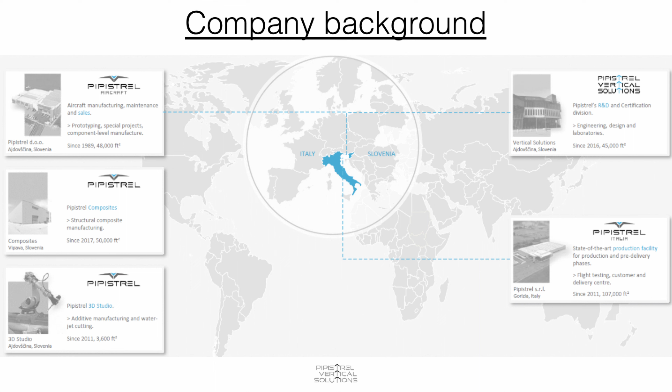As a background, Pipistrel Aircraft is an aircraft manufacturer of ultralight aircraft and general aviation aircraft, founded more than 30 years ago in Ajdovščina in Slovenia, where we have our main facility for manufacturing, maintenance, and sales, and Pipistrel Vertical Solutions, the research and development branch in which I am working. We also have a state-of-the-art production facility in Gorizia, where we produce most of our aircraft.

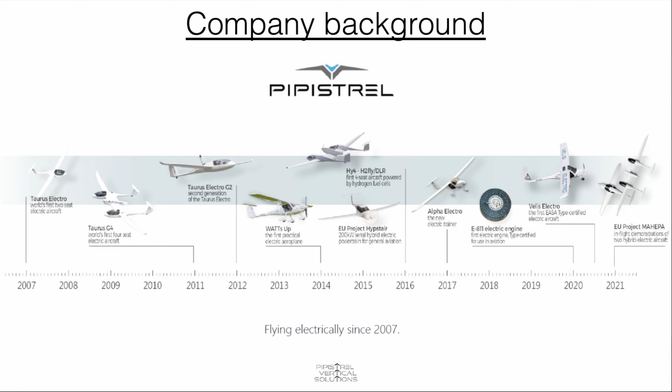Pipistrel is internationally renowned for being the pioneer of development of electric aircraft. We have been working on electric aircraft since 2007, 15 years ago, with the Pipistrel Taurus Electro. And in 2011, we modified this design to include two fuselages, as you can see in the picture here. The Taurus G4, which was the world's first electric aircraft with 4 seats, winning an internationally renowned

award by NASA. All this experience in research and development of electric aircraft allowed us to be the world's first aircraft manufacturer capable of type certifying an electric aircraft, the Pipistrel Velis Electro, back in 2020.

Now, coming to hydrogen, which is the topic of this conference, the company has extensive experience in hydrogen research activities for aircraft, starting with the HY4 aircraft, which is a modified version of the Taurus G4 with gaseous hydrogen and with fuel cells that was flight tested back in 2016. This design was improved and flight tested again in 2020 in the MAHEPA project.

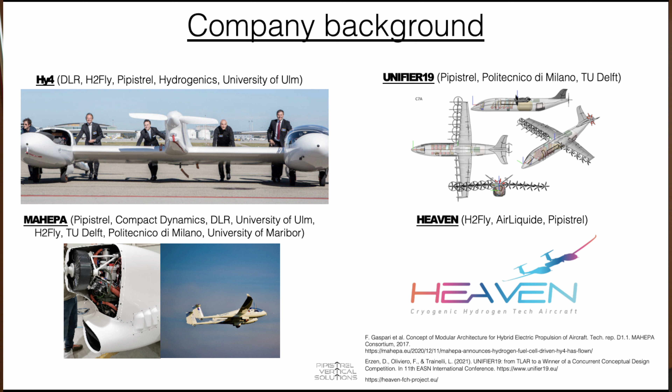And in the next months, we will be integrating a liquid hydrogen tank and flight testing this concept as well with liquid hydrogen and with fuel cells in the HEAVEN project, together with H2FLY and Air Liquide. Further, the company is researching into moving into the commuter aircraft segment with the UNIFIER19 project, in which a 19-seater aircraft with liquid hydrogen fuel and fuel cells was designed and assessed in terms of market interests.

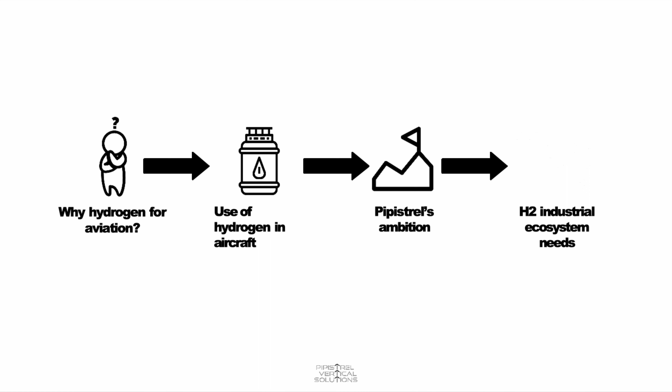So in the presentation, I will first speak about why hydrogen is interesting for aviation. Then I will continue presenting the specifics of the use of hydrogen in aircraft. I will continue the presentation with the main topic of this presentation, which is how liquid hydrogen can help fulfill Pipistrel's ambition to achieve a novel sustainable air transport market. And I will end the presentation referring to the industrial ecosystem needs that we need to make this ambition a reality.

Well, first of all, a bit of background, the environmental impact of aviation. Back in 2005, aviation contributed to more than 5% of the anthropogenic radiative forcing, which is a measure of climate impact, produced by the whole human activities. Further, the aviation industry, although this trend has changed slightly because of COVID, is increasing roughly by 5% in number of passengers per year. And it is a hard to decarbonize sector, which means that, if no climate impact abatement measures are taken, this climate impact fraction will increase in the future.

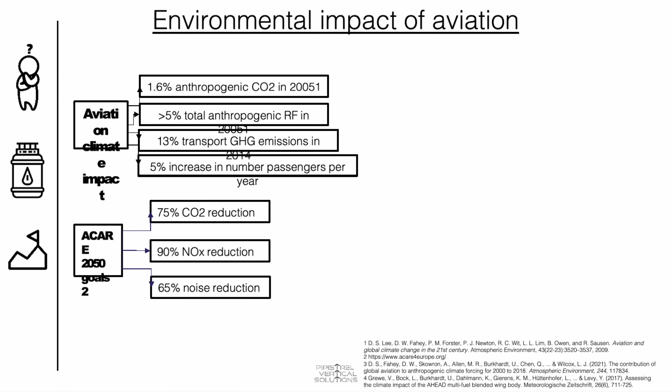For this reason, the ACARE 2050 goals have been developed that refer to a 75% carbon dioxide reduction, 90% NOx reduction, and 65% noise reduction of aircraft operations compared to year 2000. Now, if we look at how hydrogen could contribute to this, compared to the use of kerosene in gas turbine engines, we see that it is possible to completely eliminate the carbon dioxide emissions, and if fuel cells are used in the aircraft, it is possible to also completely eliminate the NOx emissions, and further to minimize the noise emissions compared to the use of a gas turbine.

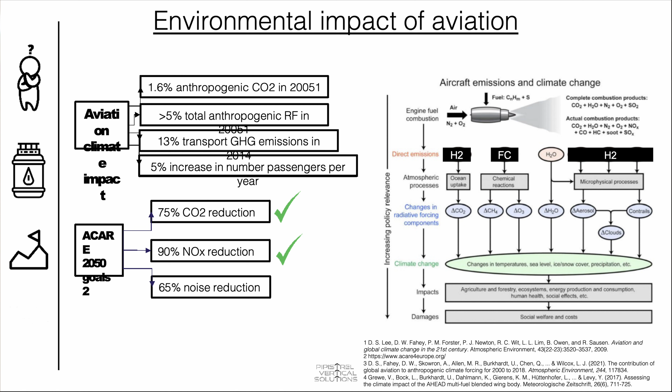Regarding the specific role of hydrogen in decarbonizing aviation, unfortunately, aviation is a hard to decarbonize segment. One of the main reasons for this is the impact of the weight of the systems on the operating costs. There is a direct correlation between the maximum takeoff weight of the aircraft and the direct operating costs, so that the more an aircraft weighs, the more expensive it is to operate it, and it might make more sense to use other transport modes.

For this reason, batteries, with low energy density and low power density compared to gas turbine engines and to kerosene, will be restricted to the use in general aviation and maybe in the commuter segment, as Pipistrel has been developing in the last years.

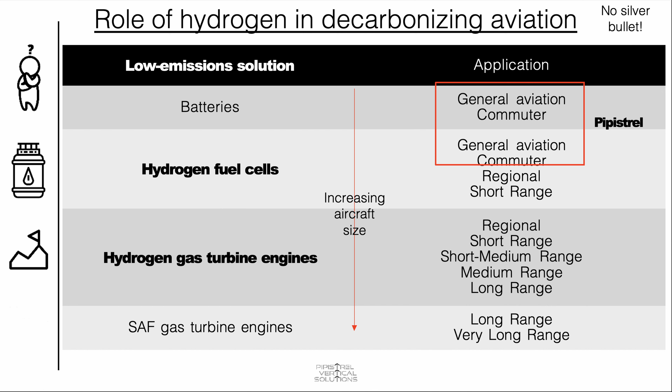Then hydrogen fuel cells and hydrogen gas turbine engines appear as an option for bigger aircraft. And when considering very long range, the use of liquid hydrogen is restricted because of the much higher volume of hydrogen compared to kerosene and the difficulties in integration, so sustainable aviation fuel such as biokerosene appears as an option.

Pipistrel is developing mainly ultralight general aviation and wants to move in the commuter segment, so our activities are mainly related to batteries and hydrogen fuel cells. Regarding the specifics of use of hydrogen in aircraft, hydrogen could be used for fuel cell powertrains, in which a fuel cell would generate electricity for an electric motor powering a propeller, or in gas turbine engines, in which there would be combustion of hydrogen.

Gas turbine engines have a higher power density, but fuel cell powertrains have a higher operating efficiency and no NOx emissions. Regarding the storage, this is the key challenge of hydrogen for aviation. Due to the integration constraints, the storage needs to ensure a high density of the hydrogen, and for this reason, liquid hydrogen appears as the dominant solution, of course with the challenges that are related, including the tank integration.

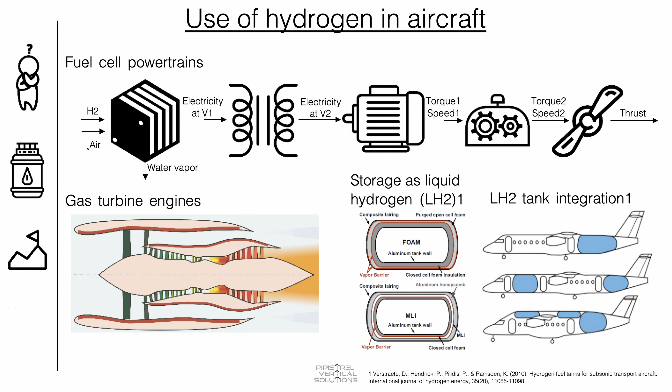In traditional aircraft, the fuel is stored in the wings, while in liquid hydrogen aircraft, the fuel will likely need to be installed in the fuselage, increasing the fuselage length. Now, after this brief introduction of hydrogen for aviation, the ambition of Pipistrel on hydrogen-powered aircraft is a product called the Pipistrel Miniliner for entry into service in 2030.

The idea of this product is to have a 19-seater commuter aircraft capable of operating in grass airfields with short runway length, so that it is possible to use the infrastructure that is currently being used only for general aviation for commercial applications, to connect regions of Europe that are not well connected by ground infrastructure. I will put the example here of the Aeroporto di Gorizia, which is a grass field located a few kilometers from here. This is an image from Google Maps; it has a runway length of 1.1 kilometers.

So the Pipistrel Miniliner would be capable of operating from this airport, opening a new node of operation that could transport passengers to an airport hub, like for example the Venice Marco Polo Airport, or to other villages that are not so well connected and already have this infrastructure, minimizing the investment in infrastructure required. Further, it is a must that this solution provides low noise. This is achieved via fuel cells and low noise propellers, so that there is no nuisance to the communities living close to the airport.

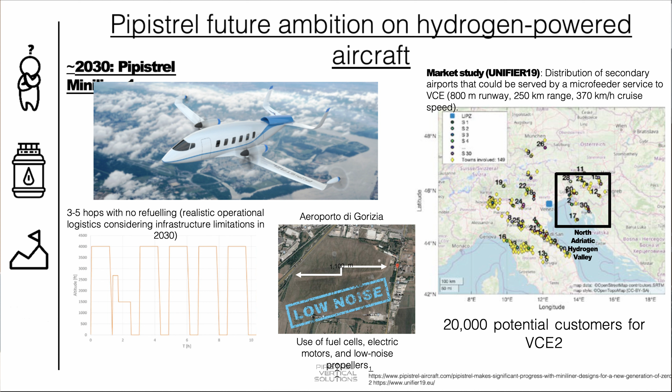The studies show that for the Venice airport, including the Italian customers, there could be 20,000 potential customers and a demand for more than 80 mini liners within Italy. Now, first, this is a render of, let's say, how this new transportation mode would work. It would be different from the traditional big airport that we are all used to. It will be a service more similar to a bus that people use for commuting.

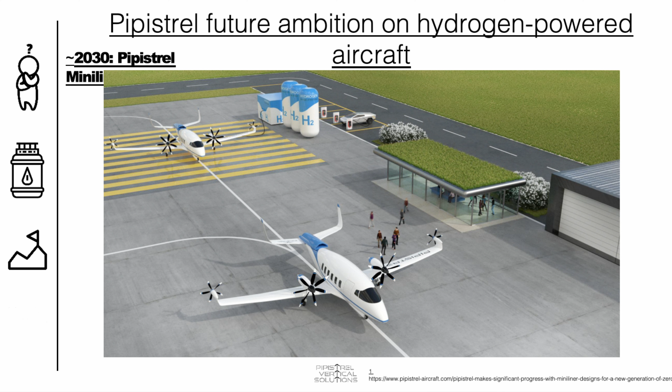And the idea would be to have a fleet of sustainable zero emissions mini liners operating between small airports and hubs, or between small airports, and serving communities that unfortunately do not have the ground infrastructure because of excessive investment required or other reasons. Now, what do we need from the hydrogen industrial ecosystem to achieve this ambition?

First of all, of course, we need a low-cost, widespread, scaled-up, and green liquid hydrogen production and distribution. The hydrogen production will be scaled up by the demand from other industries. The problem arises from the liquefaction because it is more of a niche application for space applications or for transport of liquid hydrogen. So this needs to be scaled up so that the costs are competitive compared to kerosene.

Second, the ground refueling and airport infrastructure needs to be developed, at least in the hubs. As I have said, the mini liner has the benefit that it would not require this infrastructure everywhere. But this would need to be developed further so that it is possible to operate this. Third, as it was said in the questions and answers just before, there is the need for novel regulations, standards, and means of compliance for system certification.

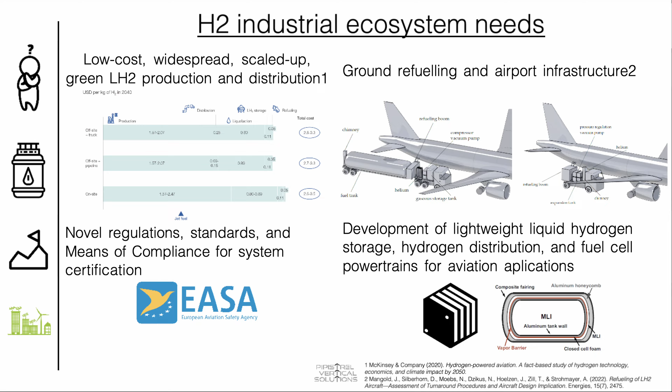And finally, novel liquid hydrogen storage systems and fuel cell powertrains for aviation that are lightweight and capable of operating at high altitudes are required to be developed by tier 1 suppliers to aircraft OEMs. Thank you for your attention.

Thank you, Pedro Garcia. I think time's against us, Pedro, so I'm going to thank you for your presentation. I think we have time for one question from the audience, because I know Pedro has to leave us very shortly. It's fine. Any questions? Yes, sir, at the back.

Really interesting presentation. Thanks for that. One of the questions I've got is around hydrogen being used as a liquid. I work in hydrogen refueling and I'm presenting next. I'm really interested in what you think is a challenge, especially around the cryogenic side, keeping it cold, because that's one of the things that we're seeing in the industry when transitioning from gas to liquid, keeping it at cryo. Do you see that as a problem for the industry you're in?

So of course it is a problem in terms of logistics because in principle gaseous hydrogen can be stored for long times, if I'm not mistaken. But in the case of liquid hydrogen, zero boil-off solutions, that would be the solutions that do not lead to hydrogen venting during storage, are still in the development phase.

As a curiosity, some information I heard some time ago in a webinar that I attended: the NASA space programs, since they started, from all the liquid hydrogen that they bought, were able to use only 50% of it. The rest was lost in boil-off losses, refueling losses, etc. So for long-term storage, there is the need to develop zero boil-off solutions so that the logistics are improved.